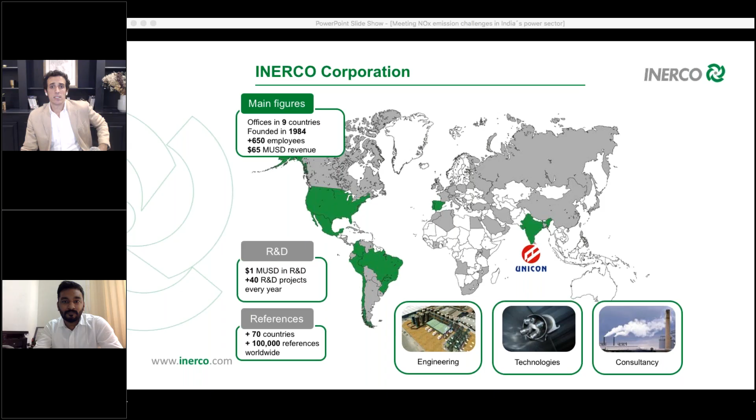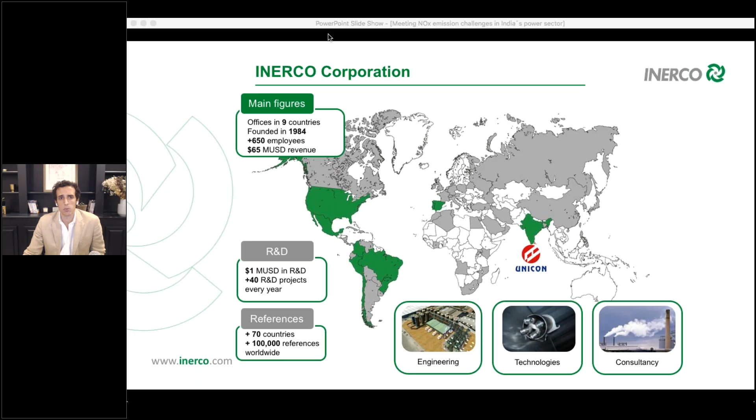So India's total installed power generation capacity is 373 gigawatts as of today. Coal represents the majority of this capacity and was responsible for almost 80% of the electricity generated in India last year.

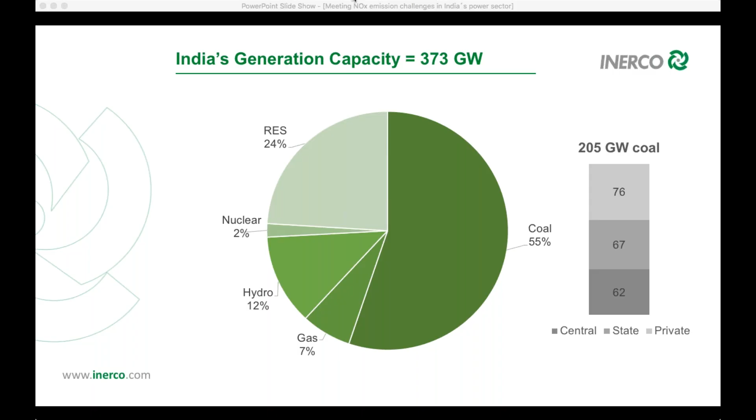In 2015, the Ministry of Environment and Forests released new emissions standards for thermal power plants, covering particulate matter, SO2, NOx, and mercury. The limit was based on the year of commissioning and the boiler size, as you can see in this table. For NOx, initially the limits were 600 milligrams per normal cubic meter for units before 2004, 300 milligrams for units before 2017, and 100 milligrams per normal cubic meter for units after 2017.

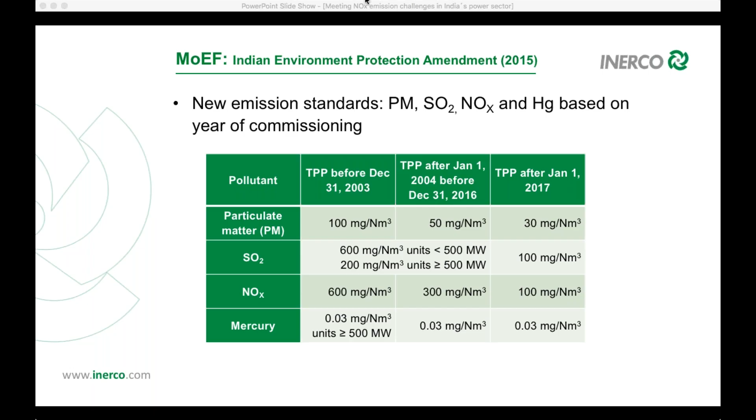However, during the last year, there was a lot of discussion about the implementation of these standards, specifically the 300 milligrams limit. Finally, in October this year, the relaxation of this limit from 300 milligrams to 450 milligrams per normal cubic meter was approved. This is what we see here.

Also, there is a lot of pressure, especially from utilities, to increase the 100 milligrams to 450, arguing that technologies for 100 milligrams are not suitable for Indian coal. So we will see what the final decision is, but it will not be a surprise to have a number in the middle, something between 100 to 450.

Comparing the implementation of environmental standards with Europe or USA, in these countries they were applying different phases during a time frame of approximately 10 years. So my guess is that in the long run, these limits will be reviewed again and more strict standards will be implemented. But of course, I'm talking long term, 10, 15 years.

Comparing emissions with the US, China, and Europe, in these territories the NOx limits are in the range between 50 to 200 milligrams per normal cubic meter, depending on the plant. So still, the India standards are quite high compared with these other territories.

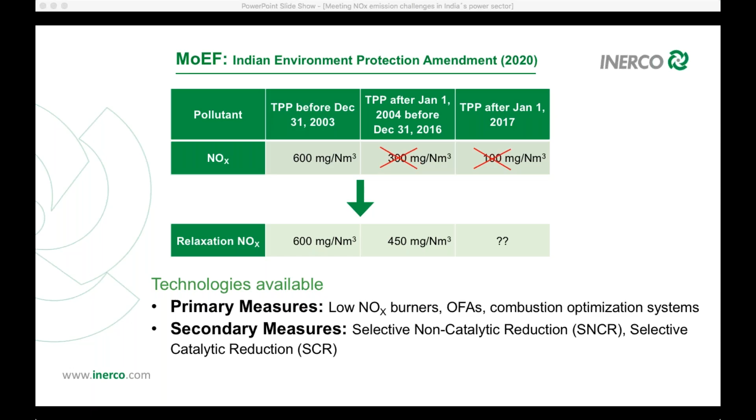Secondary measures are those that are applied after combustion, once the NOx is already generated. These are SNCR, or selective non-catalytic reduction, and SCR, or selective catalytic reduction. We will talk later about these technologies, but first let's try to characterize the NOx scenarios for the coal plants.

So in this slide, we are representing coal capacity for central, state, and private plants. Based on the age of the plant, it's possible to establish the new NOx emission limit. As you may see, most of the plants will be affected by the 600 milligram or 450 milligram limit, and a small percentage will be affected by the 100 milligram, only this part here, or whatever the limit is at the end after revision.

The majority of the plants will face the 450 milligrams scenario, shown in light green, and this will be especially in private plants where almost all of them are in this case. For central and state plants, it's also a significant and important number, those that have to go to the 600 milligrams scenario, these ones here. But as you see, most of the plants will go to 450, and in a second level of importance, they will go to the 600 milligrams scenario.

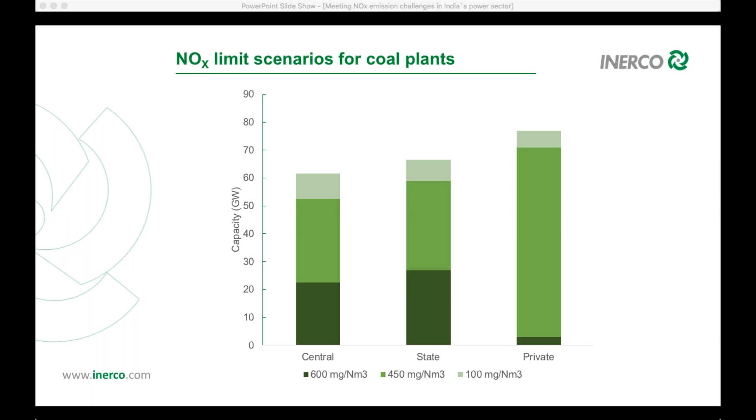So what is the baseline of the coal plants right now in India? There is very little information available at this time, but what we are trying to represent here is the average NOx values of those plants where information is available right now, and those plants that have contacted INERCO. So this is the information we have, around 30 units, and I am representing it here in this chart. So here we show current NOx emissions versus year of commissioning.

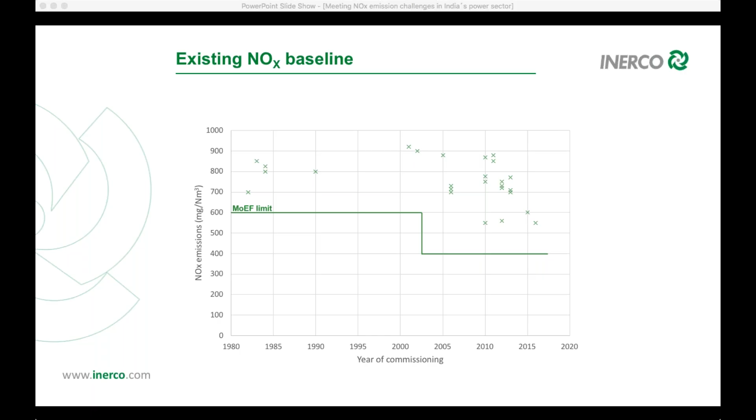What this chart shows is that old plants will typically require a 20-30% reduction, this group of plants here. Then new plants, or those after 2004, will require reductions between 25 to 60%, all those here. As you may think, the reduction percentage is quite diverse, and a specific analysis in each plant is totally required. So we're going to find plants requiring 20%, and we're going to see others where 50% will be required.

Okay, so I'm going to talk about now the combustion and low NOx technologies. As I said before, there are primary measures and secondary measures.

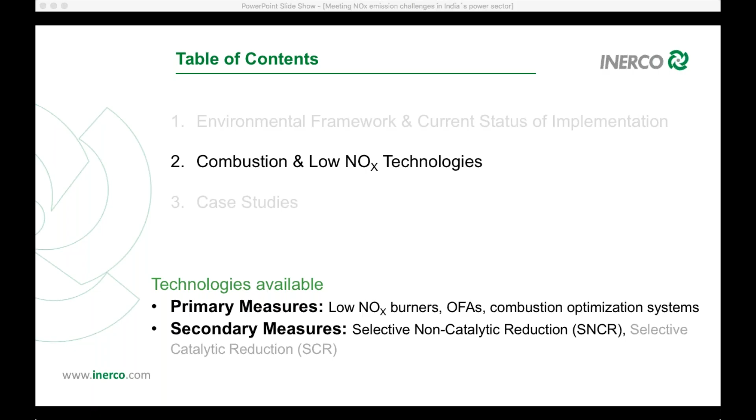In first place, we got the combustion modifications, or LNB, low NOx burners, and OFA, overfire air systems. The objective of this technology is the reduction of the O2 content in the first part of the combustion, where the majority of the NOx is generated. This is what is called combustion in substoichiometric conditions. Also, it tries to reduce the amount of fuel that is combusted at maximum temperature.

So here I'm highlighting those concepts. There is a number of different LNB designs, like auto recirculation, split flame, dual nozzle, swirl mechanisms, and so on. All those designs try to get the objectives I mentioned here: substoichiometric combustion, O2 air stratification, and low temperature combustion.

The definition of these solutions cannot be evaluated locally at burner level because the modification of the burners is going to change the combustion profile and will impact the boiler performance and operation. So this is an iterative process where several LNB designs are tested and then the results feed a model of the whole boiler. This is what I call overall boiler impact and assessment.

In all the cases, there is a number of critical aspects that have to be evaluated. First is the velocities in the burner and air nozzles. We normally need to achieve something between 30 to 40 meters per second at these locations to get enough turbulence and good mixing.

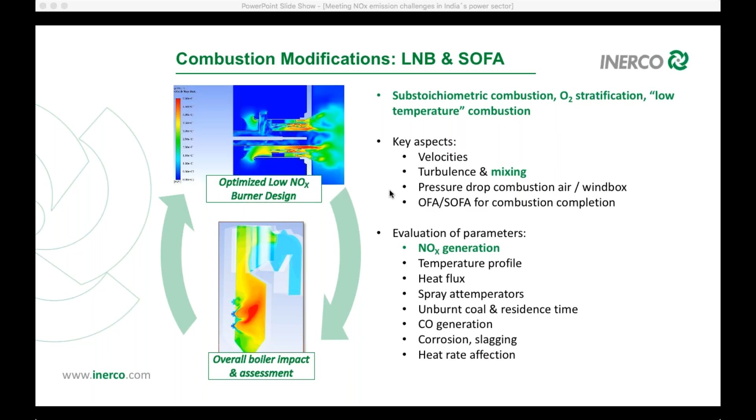So when the design is done, we can manufacture the burners, OFA nozzles, and ducts. These are pictures of our burners, okay?

Some considerations here are manufacturing procedures, material selection to guarantee durability and performance, assembly considerations, shutdown period, and commissioning. Also, specifically in coal applications, all the mechanisms that these burners have must be reliable and they have to last in a very dusty environment, because nobody wants to have a brand new burner with registers that cannot be operated after a few months after the commissioning.

So it's very important. At Inerco, we also do burner upgrades. For example, in the picture below, we modify or substitute only the parts that the burners required. This is something that can be done in some cases when we have more information about the plant or we already have worked there.

LNB technologies allow reduction in NOx emissions between 30 to 60%, depending on how complicated the design, burner retrofit, and furnace modification are.

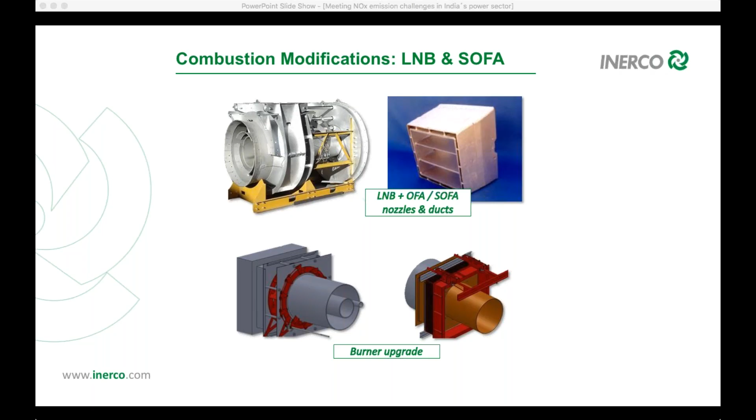In this slide, we are showing a typical project schedule for an LNB project. It's very important to note the task 'data acquisition,' which happens in the first weeks of the project. This is when we collect all the information we require to design the burners and OFA in the engineering stage.

Engineering takes around 2 to 2.5 months, and manufacturing a little bit more, over 3 months. So implementation of the solution can be done in less than 30 days. This is the installation, and commissioning is typically around 2 weeks. Obviously, COVID-19 may impact some of these tasks, but it's crucial to be coordinated with the client and suppliers in all stages of the project.

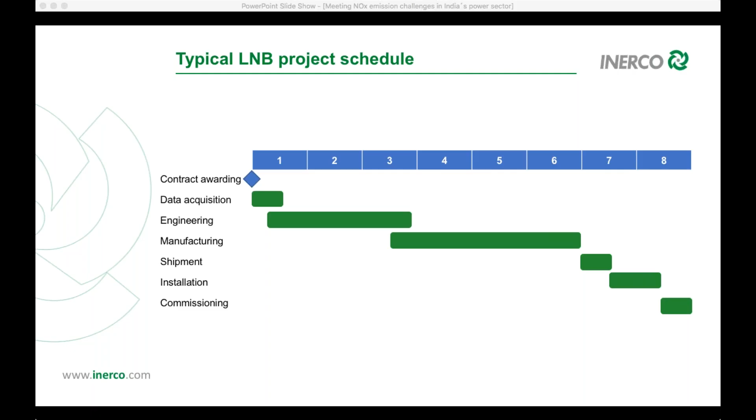There is one interesting concept about combustion modifications I'd like to explain. In a conventional system, there are situations where operation requirements negatively impact boiler performance.

For example, here on the left, we see a boiler with one of the intermediate mills out of service, maybe because it's in maintenance or just not available. In these cases, to reach full load, we need to operate with all the other mills, resulting in a gap in the combustion area, which is not good from a process point of view.

The first thing we see is an increment in NOx generation, because there is less stratification of the combustion, and the flame here gets closer to the combustion area.

The second thing is that the furnace exit gas temperature, or FEGT, may increase importantly. This is because the combustion has moved up, so more FEGT means more superheater temperature and sometimes derate in the unit.

So in this situation there is less residence time for the coal particle to be burned, so we can expect more unburned carbon and more LOI. The result is a reduction in boiler efficiency, more CO, and we can also expect more corrosion and slagging episodes.

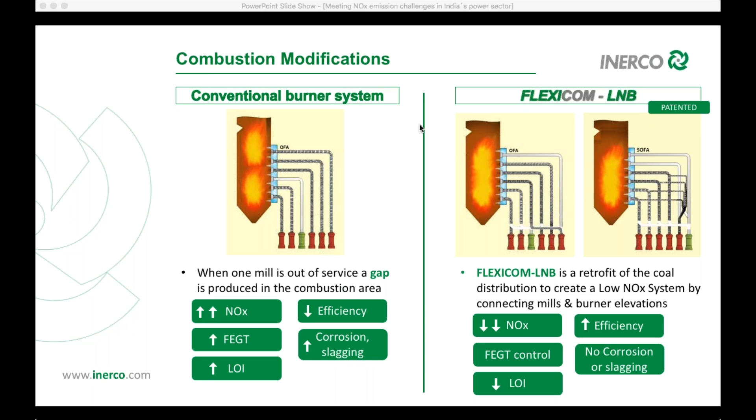In this slide, I'm going to talk a little bit about combustion optimization systems and analyzers. This is also a good way to reduce NOx emissions.

Historically, there have been neural networks that use a significant amount of plant data and provide operators with data and recommendations.

At Inerco, we developed our own combustion optimizer, called Abaco. Abaco uses features from neural networks, but also implements advanced monitoring devices, like what I call Abaco Opticom, which is the flue gas composition analysis in the boiler, or the Abaco LOI for carbon-in-ash analysis.

With this information, and based on empirical tests we perform at the plant, we configure an expert system that is able to manage combustion in closed loop control by acting on the air registers or coal registers when necessary.

Abaco technology is patented by Inerco and is also recognized as BAT, Best Available Technology, for NOx reduction and efficiency improvement by the European IPPC directive. Typically, the reduction range is between 15 to 25% maximum NOx reduction.

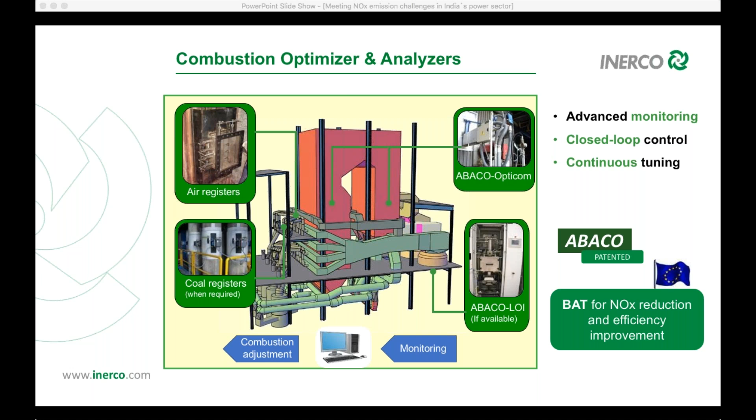SNCR, or selective non-catalytic reduction, is a secondary measure for NOx reduction. That means once the NOx is already generated, we try to reduce it using this technique, in this case by injecting an ammonia-based reagent into the furnace.

Normally, the reagent is ammonia water at 20-25% dilution, or urea up to 50% concentration. Both reagents are valid, although there is more application in cogeneration with urea, as urea has better mixing because it takes longer to decompose into ammonia, and also the urea droplet penetrates more into the flue gas stream.

The injection of the reagent has to be done in a specific range of flue gas temperature, something between 900 to 1150 Celsius, and this is normally above the nose of the boiler. The injection process is critical to ensure proper mixing of the reagent and to provide enough residence time for the reactions. That is why we rely on experience, but also on our CFD capabilities.

We have a picture here of the CFD, so we can test different injection strategies with different boiler conditions, like boiler load, excess O2, burners out of service. We really test all these conditions in the CFD model. But at the end of the day, we implement all these scenarios in a closed loop control system for the SNCR to perform well and properly in all scenarios.

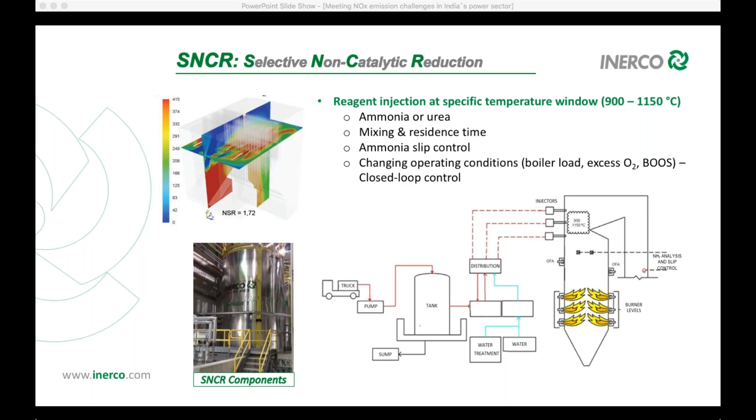Okay, so trying to summarize all the concepts I have explained in this webinar, I've done this table where I'm representing the NOx emission scenarios that the power plants are facing.

So, the limit they have to achieve, and the technologies or combination of technologies required to move in that direction is mentioned here. I'm also considering a baseline between 700 to 900 milligrams per normal cubic meter, which is the data we are seeing in the plants that have contacted us.

Low-NOx burners will become the new standard as units move to 450 milligrams. All of them are going to require solutions like low-NOx burners. Then we have one more scenario, as I mentioned at the beginning of the presentation.

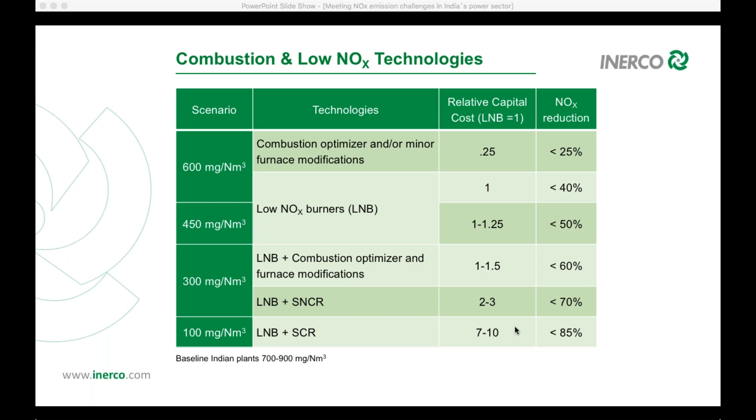However, these systems are widely implemented worldwide, and they are one option that I envision more in the long term than in the next few years.

So at Inerco, we can provide all the services and technology that I mentioned. We perform combustion diagnosis, warranty tests. We have extensive experience in all kinds of boilers and fuels, and we also have our own capabilities for consultancy and CFD studies. We supply all the technologies mentioned: low-NOx burners, Flexicom, monitor, CEMS, continuous emission monitoring system. We have our own combustion optimizer, Abaco, and also secondary measures like SNCR and SCR.

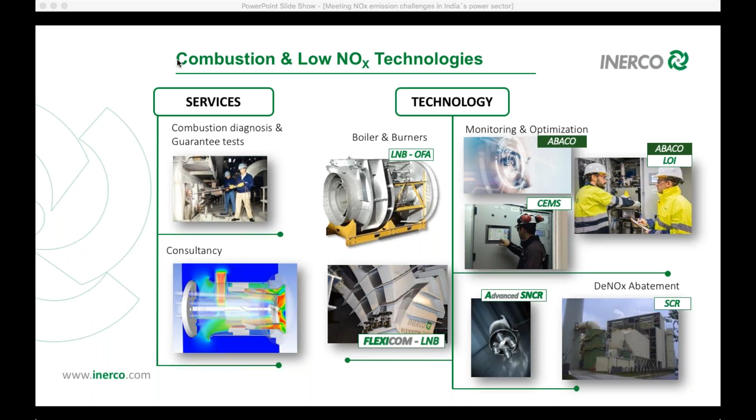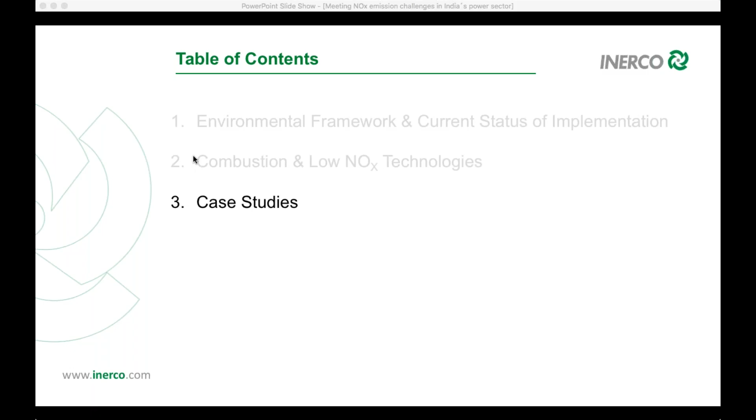So now for the rest of the presentation, I'm going to go through case studies. I'll show you 2-3 case studies very briefly, things that we have done in other places.

This, for example, is a power plant in Chile called Bocamina. It's a tangential unit, 127 megawatts with 4 mills and 4 burner elevations. Originally, the baseline was 550 milligrams per normal cubic meter, and the objective was to be below 400.

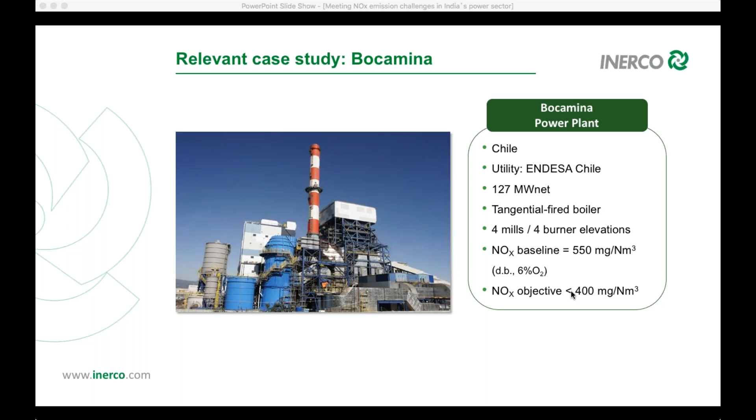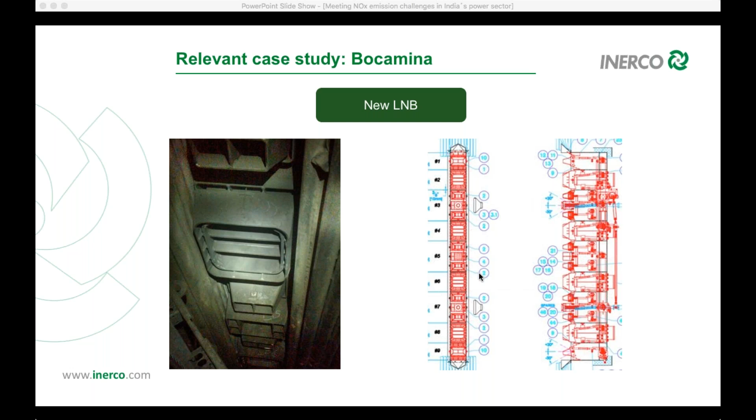What we did in this plant was to install new low-NOx burners. This is a picture of what we installed with some schematic views. We also installed a SOFA, a separated overfire air system. You see here in the 4 corners a picture of what we installed, and these are drawings of the new ducting we had to install.

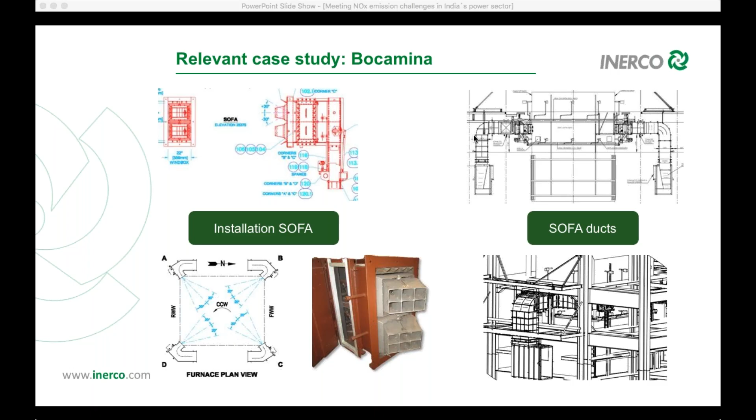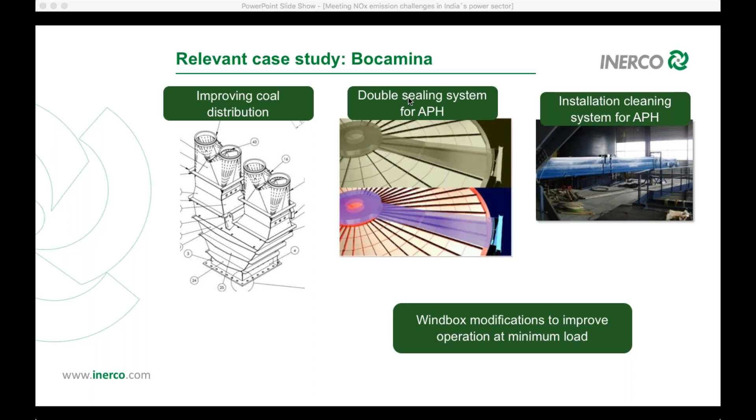In this plant, we also had to improve coal distribution, installing or modifying the splitters. And we also worked on the air preheaters, installing a new double sealing system and a new cleaning system.

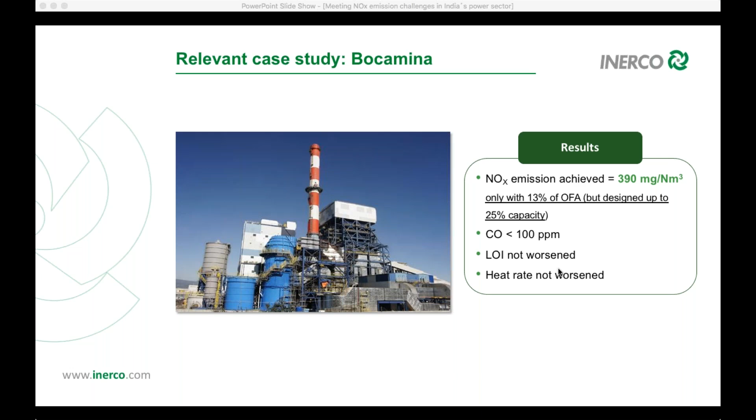This is a good example of application of low-NOx burners in tangential units. In Lada, this is another case study.

Lada is a power plant in Spain, the utility is Iberdrola. This is a 350 megawatt plant, an opposed wall fired boiler, so it has frontal burners on both sides of the boiler, with 5 mills and 5 plus 5 burner elevations.

In this plant, the baseline was 700 milligrams, and the objective was very ambitious - to be below 200, which was the emission limit at that time. In addition, this plant had slagging problems, and the top burners were damaged, with some corrosion in the side walls.

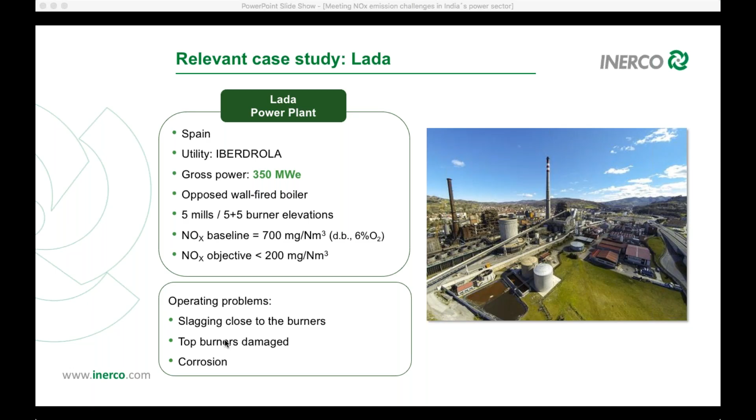This is a view of the previous situation of the plant. This plant could achieve full load with these mills or burner elevations in service - so in this situation, they could go to full load.

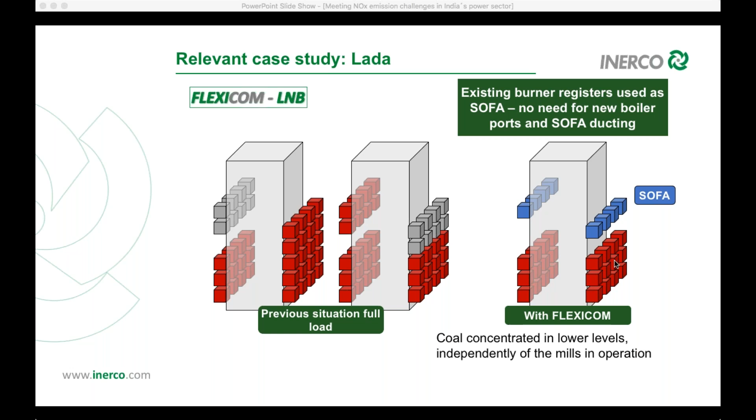The problem with this plant is that they don't have room or space to install new SOFA ducts or SOFA registers. So this was a perfect application for the Flexicom, because we use the existing burner registers as SOFA ports. With the Flexicom, we were able to concentrate everything in the lower levels, independent of which mill is in operation, and then use the upper registers as SOFA.

In the engineering stage, we did a lot of CFD models. We tested different models of burners, looking at geometry, material, and NOx generation. Like I mentioned before, this is a very iterative process. So once we got this, we moved to the furnace assessment, looking at overall NOx generation, heat transfer, how we're impacting the furnace, velocities, carbon in ash, CO generation, and corrosion.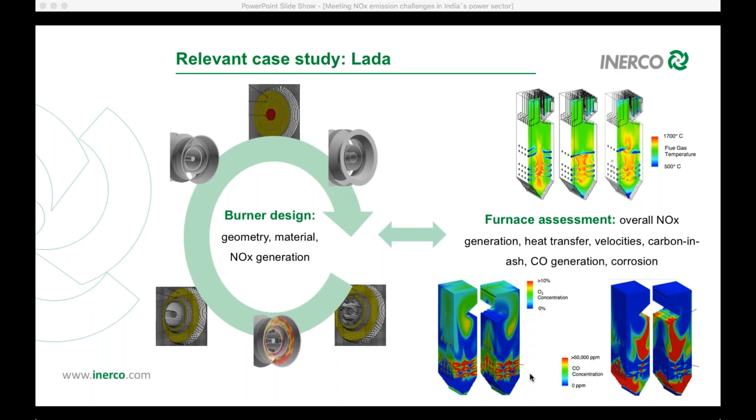So what we installed in the plant: we installed the burners here. We also installed new ducting connections at the mill level for the FLEXICOM. We retrofit the wind box for this new configuration where we have everything in the bottom part, and we also installed curtain air to protect the sidewalls where we had localized high CO and corrosion.

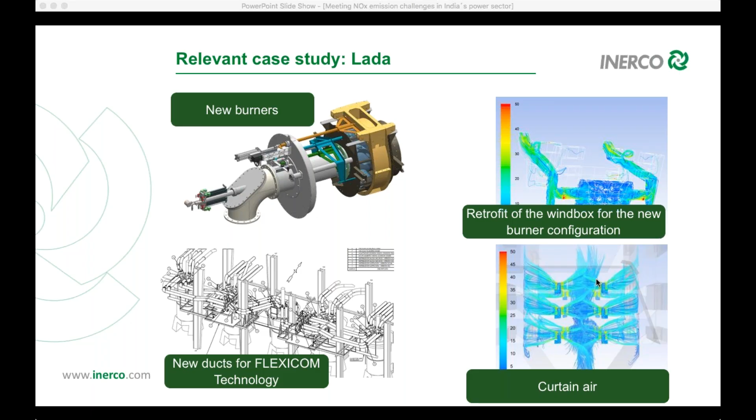In addition, we installed an SNCR system with urea. This is a picture of the storage tank, some pumps, and the distribution system, with the idea of injecting the urea in the upper part of the boiler.

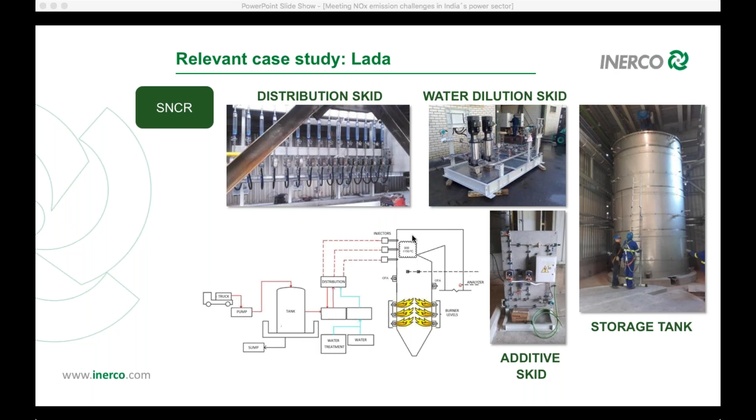The results of the project were really good again. Remember, we have a baseline of 700 milligrams. Only with combustion modifications, we were able to reach 240 milligrams, a 65% reduction, which is a lot. And then using the SNCR, we were able to go below 170 milligrams, well below the objective we were required.

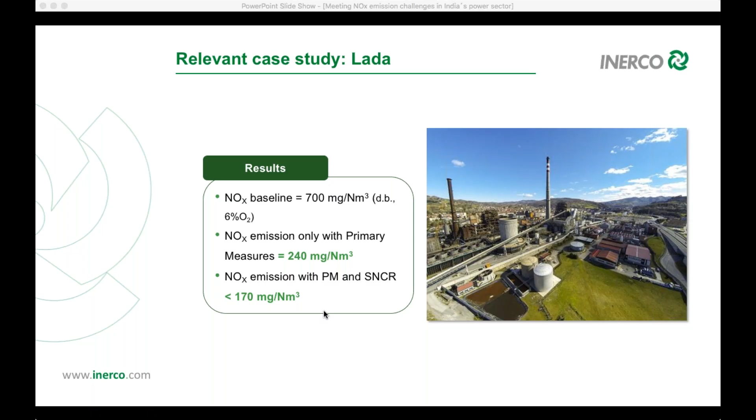The third relevant case study, and the last one I want to mention, is Battle River Generating Station. This is a utility power plant in Canada, ATCO Power. It's around 400 megawatts, a twin furnace boiler design with 8 corners. It has 5 mills and 5 elevations.

The baseline was very diverse, something between 500 to 800 milligrams. The idea of the project was to achieve something between 15 to 30% reduction. That was achieved by the end. Actually, the official result was that for all the load range, it was something between 15 to 40% reduction. Also, heat rate improvement — we got 0.5% improvement there. The technology we applied in this case was Abaco, only the combustion optimizer.

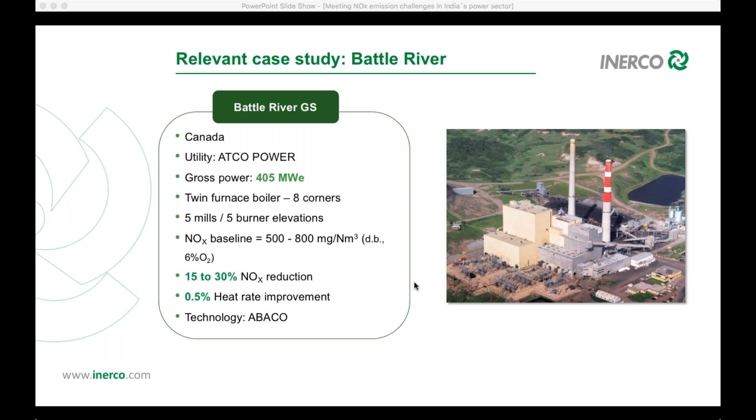Abaco, as I mentioned before, is an optimizer of the combustion, using a monitoring system we install at the boiler. So we get a map here — this is an actual picture of the control room, and the information from these monitors is shown here. The Abaco then works in closed loop control, tuning the air registers and the excess O2, and major combustion parameters, to always stay at the optimum point of combustion and performance. We also do remote supervision of the system, connecting from our offices to see in real time what is happening, and we report monthly on the situation to the plant.

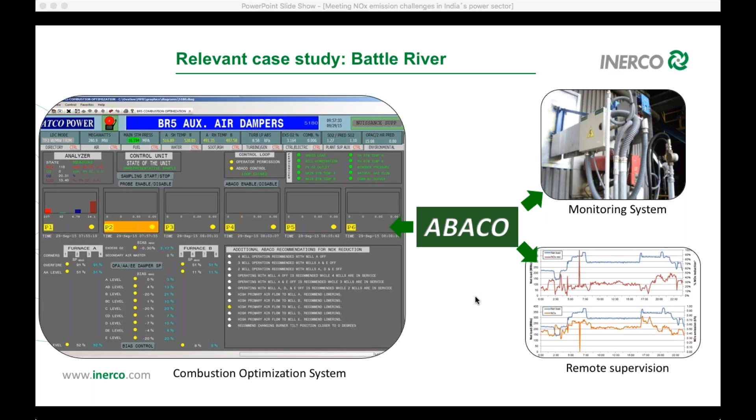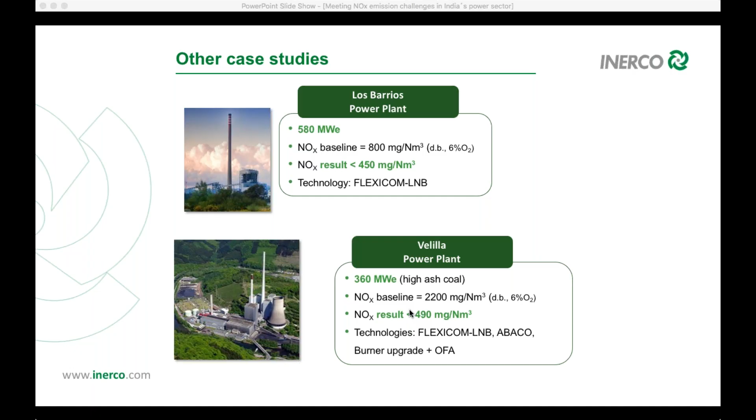I'm just going to mention a few other cases. We have more references — this is a tangential unit in Los Barrios, where again the objective was similar to the one in India, to go below 450. We have another plant in Velilla, which was using a coal with high ash content, above 45% ash. The baseline was very high, and the NOx result was below 500. Again, we used FLEXICOM-LNB and Abaco.

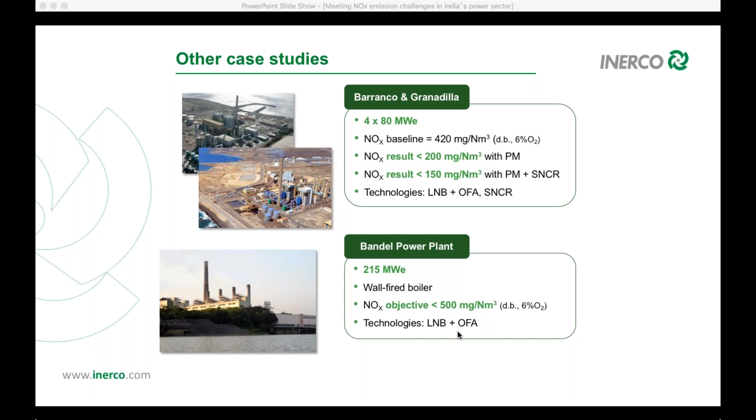We also have other cases, like Barranco Granadilla, where we combined combustion modifications with SNCR, achieving below 200, or with SNCR below 150 — a great result. Last but not least is a very important project for us: Bandel, our first project in India. It's a 215 megawatt plant with a wall-fired boiler. The objective is to be below 500 milligrams, and the project is being executed at the moment. We are manufacturing the burners, and it should be complete soon. The technologies we are applying are low NOx burners plus OFA.